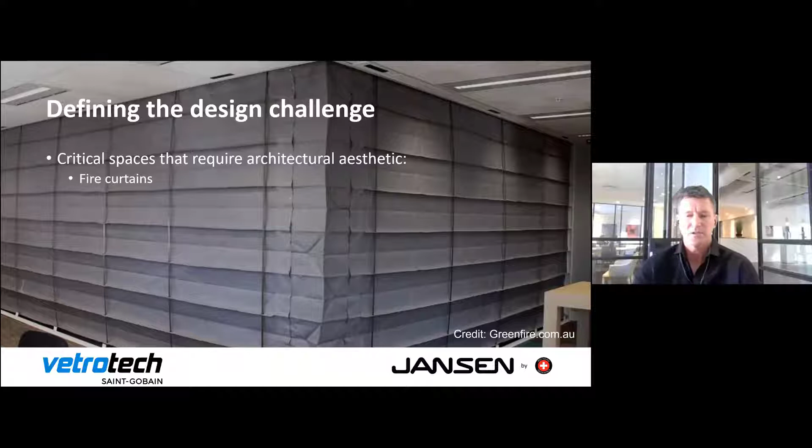So where would you use these? Typically in areas where you'd need fire curtains, there are places where, because of bulkhead details, it just doesn't make sense to use a fire curtain, or there might be budgetary requirements that make fire curtains not the right way to resolve the issue everywhere. Another typical situation is where you have to do drenching with sprinklers.

This is actually a building I'm sitting in at the moment, and that's a glazed meeting room. You'll see a lot of sprinkler pipes to drench that. In some countries this is no longer allowed, because cold water on the glass under fire load can cause it to shatter. So this is a typical instance where you might want to use insulated glazing.

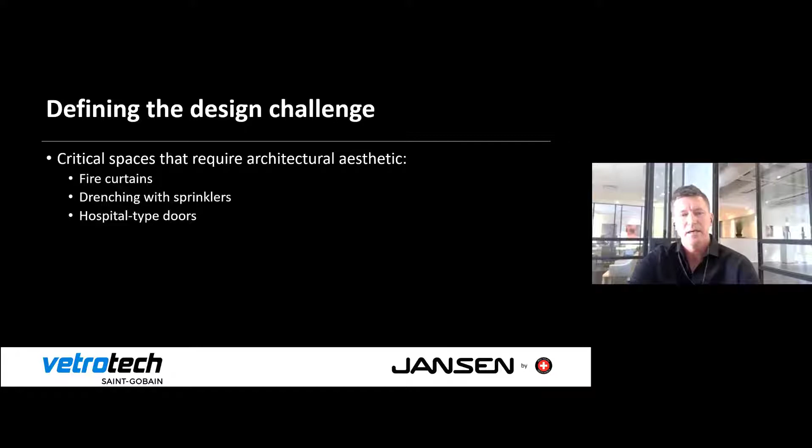This is the Class B typical doors that I mentioned at the beginning, and the small portal as per the code. Again, you might want in an atrium area to have something more aesthetically appealing, so you'd want an insulated glass double door, a Class B door.

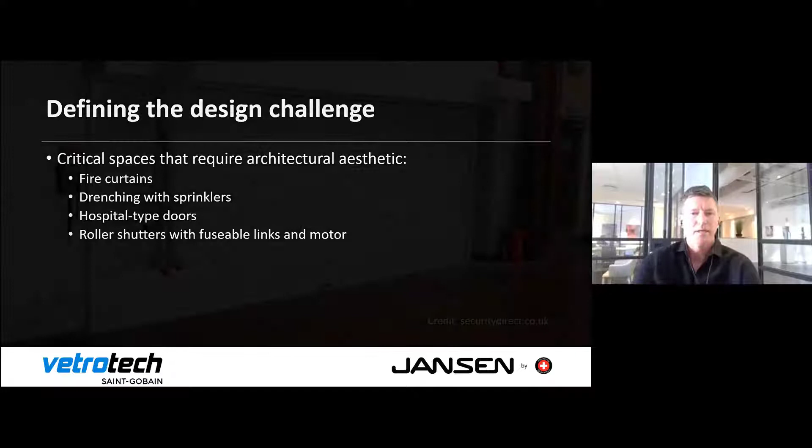Then maybe the last one is roller shutters with fusible links. I know these are being used quite often now in lift lobby situations where you need both the shutter and the fusible link, and you need a motor, because some fire engineers insist that it can't drop too fast, as that might be a life safety issue. So those are the typical situations where you would use it.

What I'd like to do now is hand over to Kobus Stredom, but just before that I want to introduce him. Kobus, thanks to you and all the speakers for being here. I know that during COVID it's been quite a stressful time for all of us, so we really appreciate you taking time out of your schedule to join us.

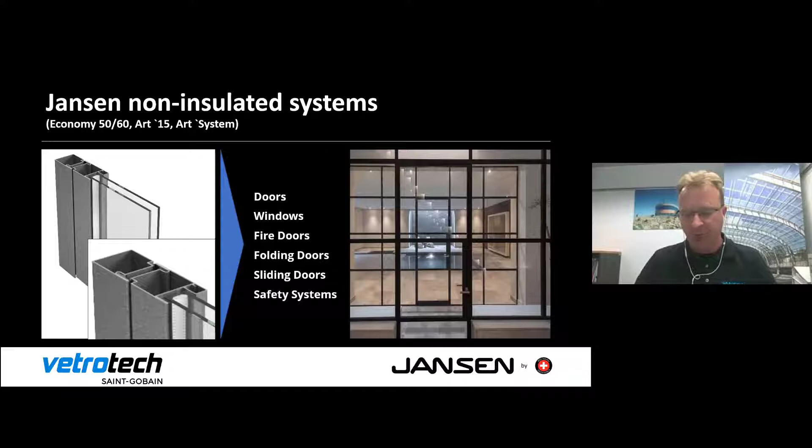Maybe these systems will not have the best thermal values — this is why they're used for indoor applications — but they do offer the design freedom and the statical strength of steel. Therefore, they can also be used for folding doors, sliding doors, larger elements, and safety systems. When I say safety systems, I mean burglar resistance systems up to class RC4, which is quite high in the market, and bullet resistance up to class FB6, which is a machine gun, a Kalashnikov. On some projects, we have also realized solutions which are explosion proof. So these systems will go a long way. A couple of examples: inside applications, a sliding door, and a folding door in a private house.

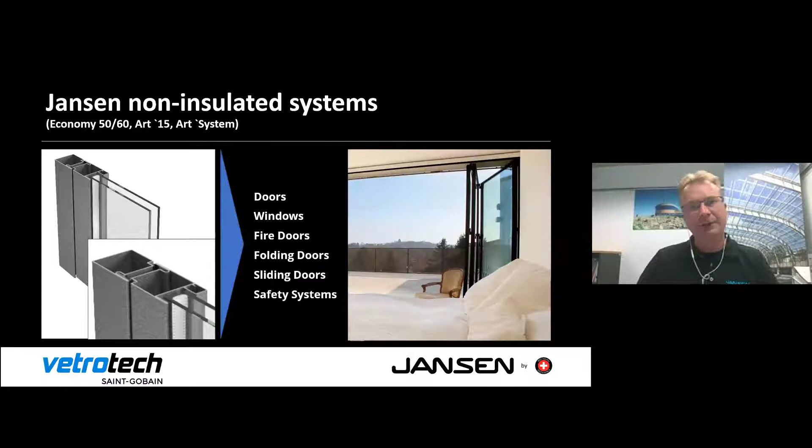Let me move to thermally insulated systems. Here we talk about the Janisol system, Janisol HI — highly insulated — and the two ARTE systems with small, thin profiles, ARTE 2.0 and ARTE 66. These systems are based again on the same principle: we have two steel half shells connected with an FRP insulator, fiber glass reinforced plastic. The chambers within the profiles are separated by aluminum screens, increasing the thermal values well beyond the passive house standards.

We can make doors, windows out of these systems, folding doors as well, sliding doors, and safety systems. Safety systems, of course, here again, meaning burglar resistance, bullet resistance, finger protection, and also emergency panic doors. All our safety systems can be equipped with the panic functions, panic function B, C, D, E, depending on the requirements.

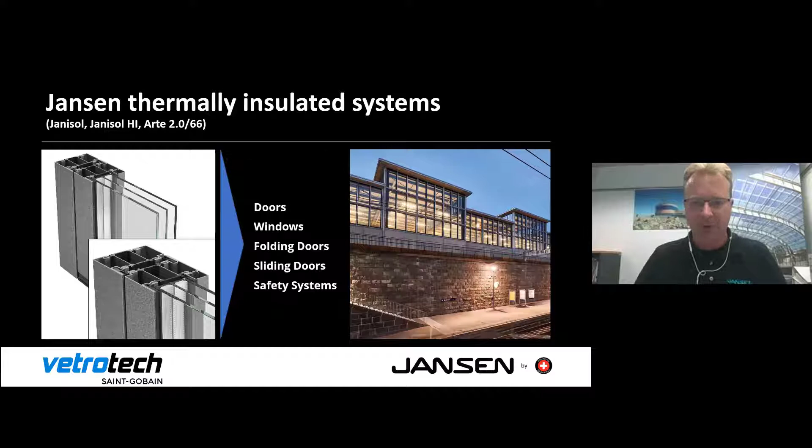A couple of examples here. This is a residential building in Amsterdam, ARTE 2.0.

Let me move on to the thermally insulated fire systems. Here, JANSEN features two profile families. The first one is Janisol 2. The system or the principle actually is the same as the insulated systems. We have two steel half shells connected with an FRP insulator. Additionally, these systems are equipped with cooling material, cooling agents. In the case of Janisol 2, this is plaster, gypsum, two inserts on both sides of the profile. The role of the material is to cool the frame, to cool the profile during a case of fire, thus allowing us to cover the classes EI.

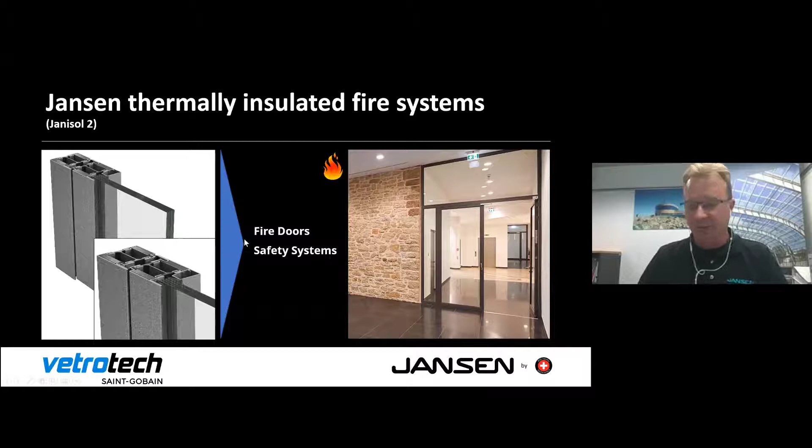So these are thermally insulated fire stop systems up to the duration of 30 minutes. We can make fire doors out of Janisol 2 and also equip these elements with safety features. Again, RC burglar resistance, FB bulletproof, panic functions, finger protection, and so on.

Let me move to the next system, which is Janisol C4. Next to Janisol 2, JANSEN offers a state-of-the-art system for insulated fire protection. Again, the same principle, two half shells connected with an FRP insulator. In the case of Janisol C4, C stands for ceramic mass, fourth generation of the ceramic mass which fills the profile. The profiles, as you see on the picture, are fully filled with the ceramic mass. The profiles feature a plastic conduit for electrical cables or an additional locking point, the locking rod that was run through the conduit. So prepared for several different functions.

The ceramic mass will have the same role as the gypsum inserts on Janisol 2. They will cool the element, cool the frame, and in connection with an insulated glass, we can cover classes EI 60 minutes, EI 90 minutes, and on projects we have realized also values of 120 minutes, 2 hours.

The combination, so let's see what elements we can make: of course fire doors, separations, fixed glazing based on the system, and equip these elements also with safety features. Again, here we speak about bulletproofing, burglary resistance, finger protection, panic doors, emergency exits. In fact, Janisol 2 and Janisol C4 are often used to produce multifunction doors that feature all these functions in one.

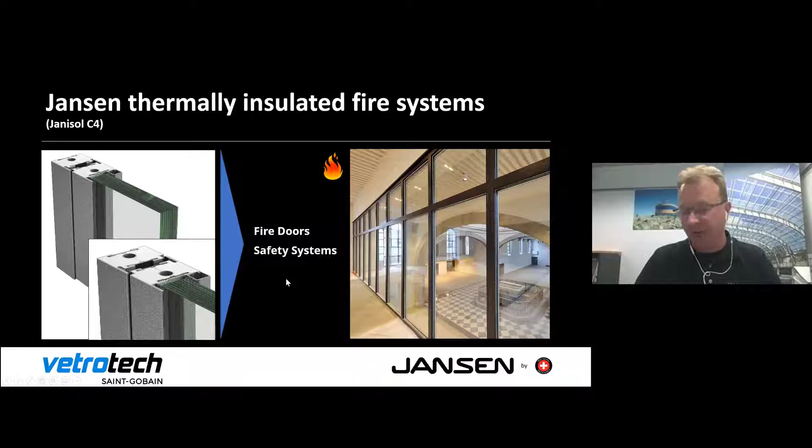Let me move on to the facade systems and roof glazing systems. Within the JANSEN portfolio, you will find them under the name of VISS. VISS stands for Fully Insulated Sprossensystem, which in German means mullion and transom system. VISS can also be built as a VISS Basic system using the carrying construction not based on JANSEN profiles. So here the design freedom is great. You can use either the full package from JANSEN or base it on your own carrying profiles.

VISS Fire features the fireproof version of the system, classes 30, 60, and 90 minutes. Facades can be made out of VISS, roof glazing, fire solutions. So as I said, all these systems, either the standard version or fireproof version.

Safety systems, as I said, also can be combined with VISS. So here again, we have the option of equipping a facade or a roof glazing with bulletproof functions or burglar resistance functions.

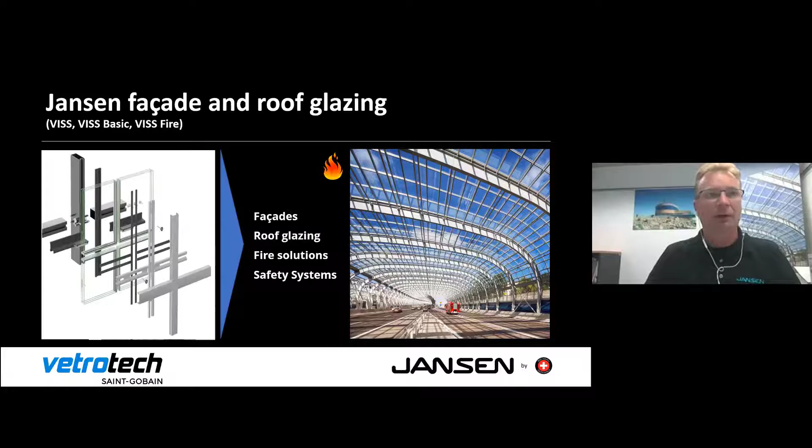Now the question, why steel? Why do I mention steel so many times? Steel is really the great material for windows, doors, and facades. Let me tell you a couple of reasons why this is so. Fire resistance and thermal expansion and thermal conductivity are key when it comes to fire protection. Steel has a higher melting temperature than aluminum, 1,550 degrees Celsius versus 660 degrees Celsius, and this shows.

Thermal expansion is also key when it comes to large elements. Imagine a facade 130 meters long and 20 meters high. The expansion will be enormous here, and again it makes sense to use steel on such projects instead of aluminum.

Thermal conductivity is also something I would like to mention. Steel is a better insulator than aluminum, and therefore it has better thermal values when it comes to thermal separation.

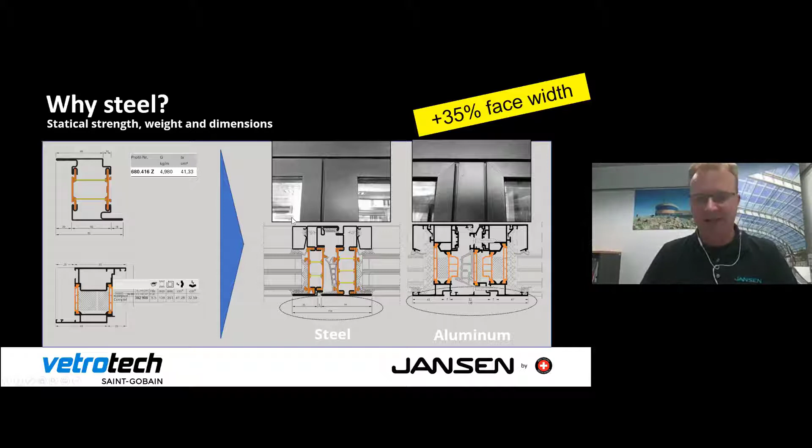And the last reason I would like to mention today is the design freedom and longevity of the material. With steel, I could say it's really the material that makes architects' dreams come true. You can see it here in this picture.

So all in all, to summarize my presentation today, the systems we offer at Jansen allow the construction of any element that constitutes either a separation of an inner space in a building, or builds the outer skin, the envelope of a building. Steel is strong, it has long longevity, and it does not require any reinforcement when it comes to oversized and large loads of glass.

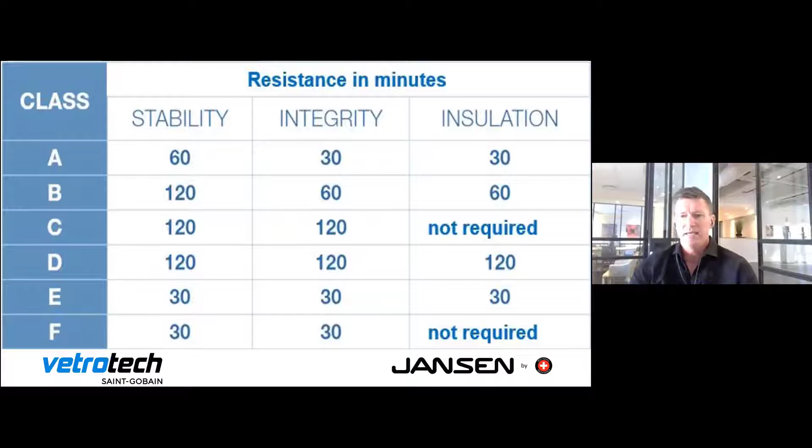At the moment in this country, class F door at the bottom requires 30 minutes stability, 30 minutes integrity, and insulation not required. So currently we can do that with glass in South Africa, but as soon as you have insulation requirements like you see on the screen here - class A, class B, D and E - then you need insulated glass. And for that reason, we've got Luis Cantero, who's been in the space for a long time, joining us from Spain, from Madrid.

He's the country manager for several South Europe and Africa countries, including South Africa, and has been in this industry for over 30 years, and specifically in the fire space with VETROTECH for 13. He holds a technical and MBA degree, and Luis will be giving us an overview of the glass options from VETROTECH, and maybe be a help to you as architects when you are specifying.

Thanks, Luis. Okay, thanks, David, for your presentation. It's a pleasure to be here with you, and thanks to all of the participants. I'll share my screen right now. I'm sorry if, because English is not my mother tongue, but I hope all my colleagues will also help with the language if anything doesn't work.

The goal of this presentation, a 15-minute presentation, is that you understand all the capabilities of the glass, and to differentiate the three options that we have on glass: integrity, as David said, EW, like heat radiation control, and the fully insulated fire resistant glass, but in Europe standard we call EI.

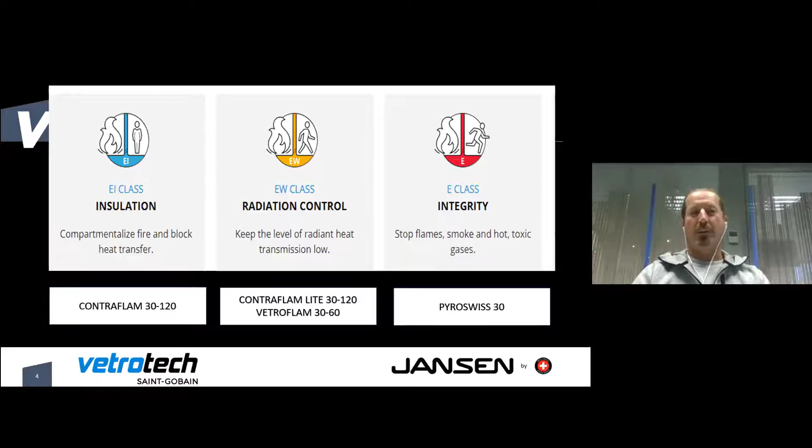On the other hand, on the left, you have the most performant glass classification, which is EI, which is insulation. There you can compartmentalize and block the heat transfer. So as you see in the pictogram, if you stay close to the glass, even when the fire is 1,000 degrees on the other side, you can be safe.

In between these two categories, there is an EW category in the European standard, that does not happen in the South African standard. EW means you have partial heat control of the radiant heat, so it can be safe, but you cannot stay there for very long.

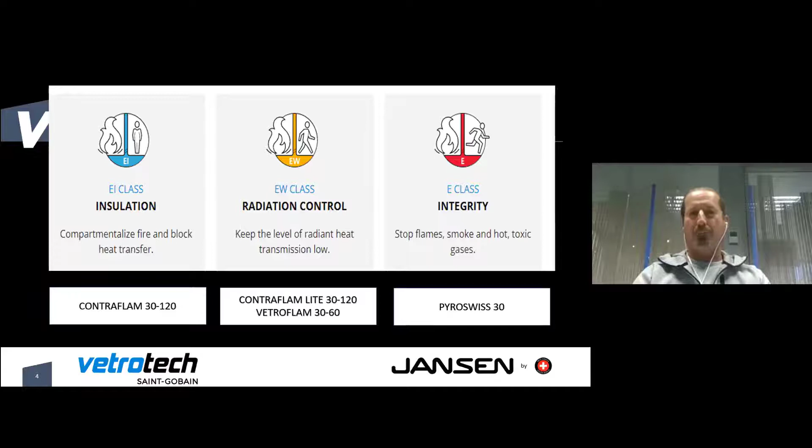Now I won't show you all the video, because I'm quite late on time, but I just want to show you the consequences of having the heat on the glass.

I can go. You can see here how it's just the consequences of having the effect of fire, the temperature of the fire on the other side, on the protective area. A piece of cloth and paper are stuck on both glass panes fitted into a frame. They simulate objects on the non-fire side during an event of fire. What do you think will happen to them?

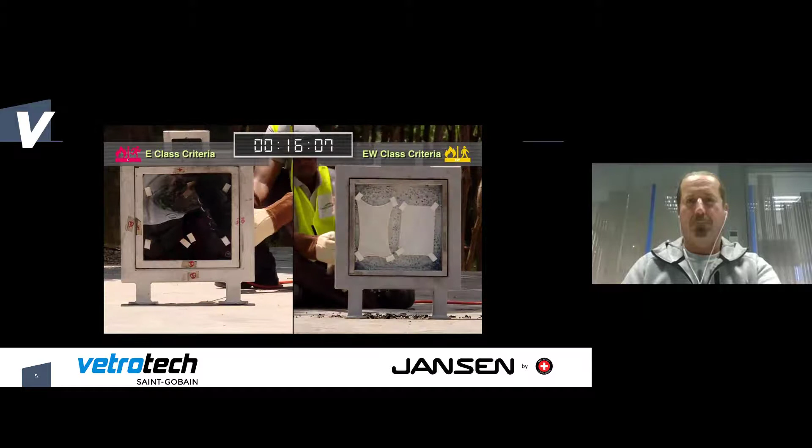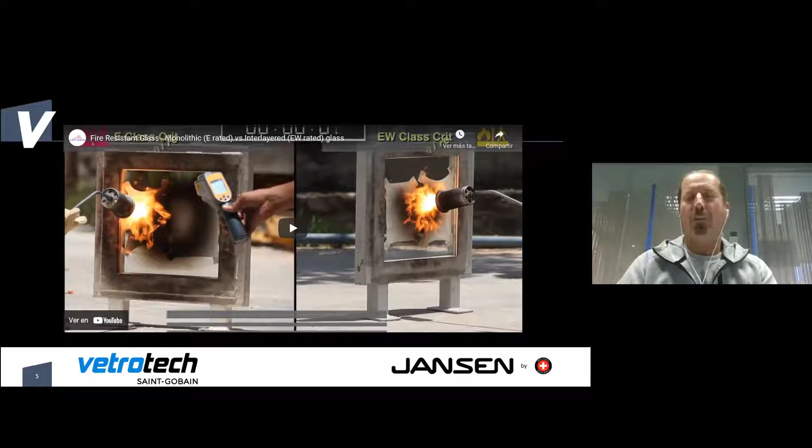Okay, I think that's enough to show you the difference between an E and EW or an EI. On one side, the temperature is not controlled, so you cannot consider that area safe. On the other side of the partition, with the EW or EI class, where you fully control the heating of the fire, you create a safe area to be protected from fire.

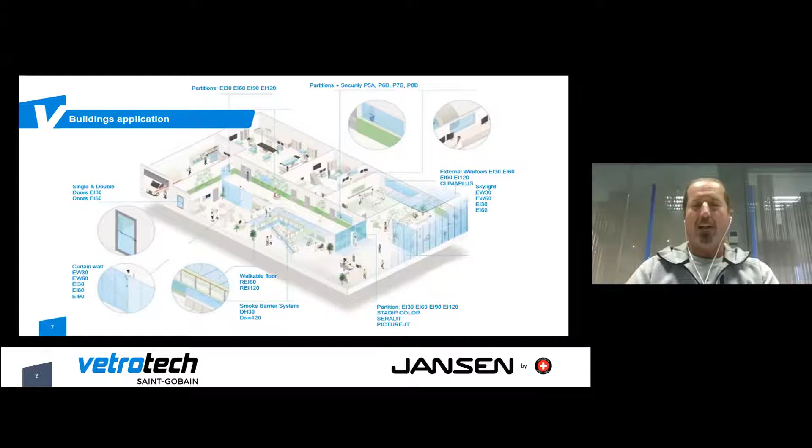Even we can provide solutions for stairs, walkable stairs that are also fire resistant. So you can be as flexible as you want with your designs, and you can count on glass that satisfies the needs of fire resistance, and also local requirements like solar gains, isolation, thermal isolation, and so on. That is the way we normally treat the prescription with the architect.

The first question we ask is: what fire resistance level do you request? Do you need integrity only, heat radiation control, or full insulation? Then, what is the time of fire resistance you need to evacuate your building according to the standards? It can go from 30 minutes to 120 minutes. And then, of course, what system do you need? Do you want to use steel, aluminum, or timber?

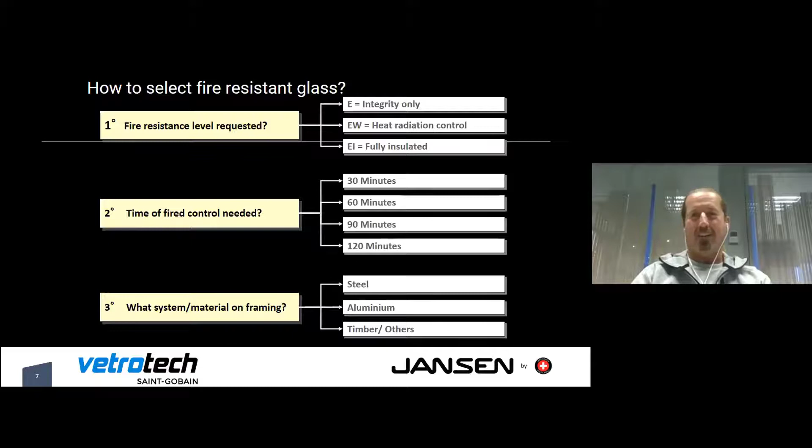Of course, steel, as Andrea said, is the one that will get you the lowest thickness and more sizes compared to aluminum, timber, or other solutions. So if you don't want to see a frame, you need to go with steel because it's the most suitable solution.

Then we have to think about what application or use we need. Is it an interior or external application? Do we need double glazing? Do we need solar control? And something very important for us: is the fire origin one side or two sides? We don't propose the same solutions if the fire comes from only one side or from two sides. That is, as I said, very important.

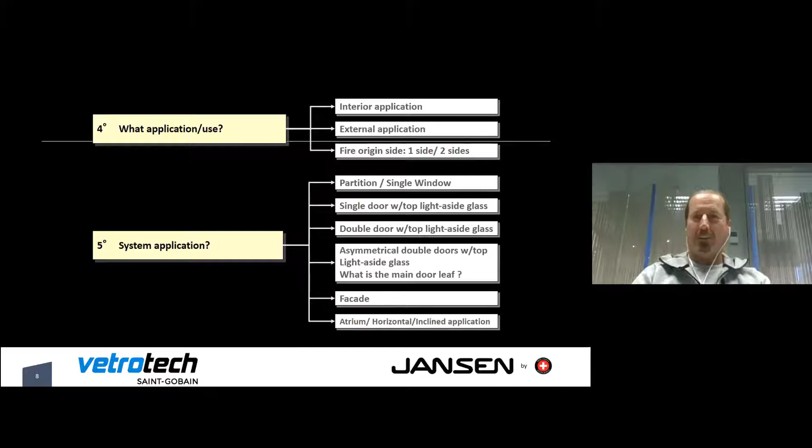The system application can be a single window, a partition, a single door, a double door, an asymmetrical door, a facade, or an atrium, horizontal, sloped, or inclined application. Why this fifth point? Because all these solutions are tested, and tested under different standards, and tested differently. It's not the same to test a door as to test a partition, nor a single door as a double door. So it's important to be aware of what we have tested and what has been proposed for your building. We cannot certify a double door with just a single door test report.

And then, at the end, the last point is just the configuration of the glass itself. Is it single glass because of interior application, or not needed for thermal or acoustic performance? Or is it a double glazed door?

Is it laminated because you need to protect also from attack, or do you need some opacity, some confidentiality? Do you need to control the noise? Then you have acoustic PVB, and we need to know also what is the dB values, and if we are talking about RA or whatever.

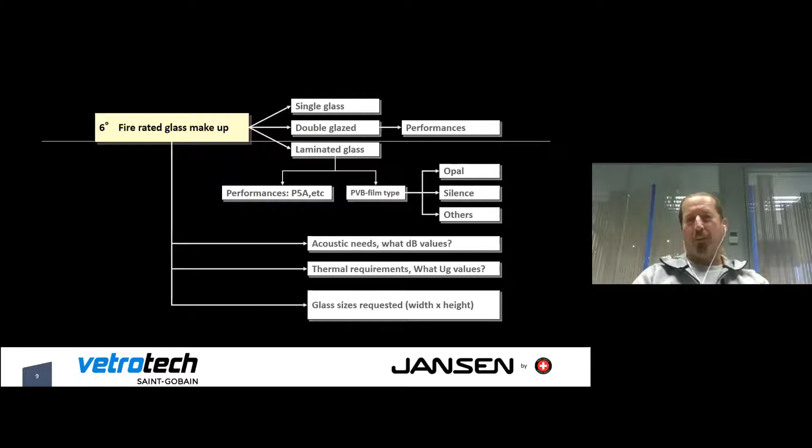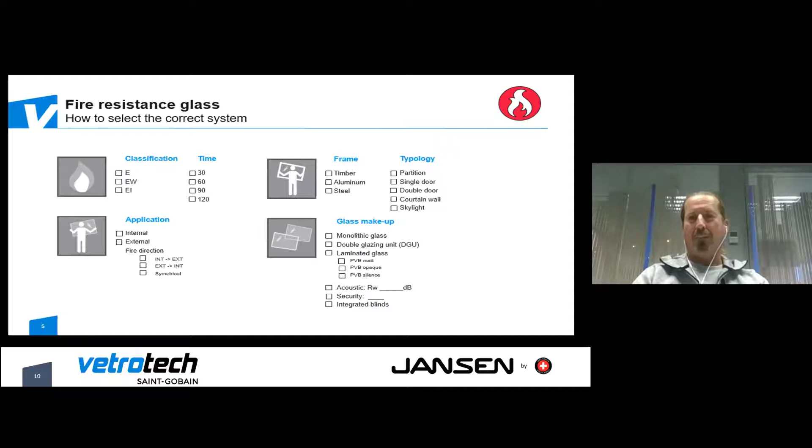And of course it's important to know width by height, because we are limited because of the testing. This is the slide we normally send to the architects so they will fulfill it with all the elements they have, and if they don't have it, then we will help them to define their requirements.

This is just an example of the test. In every test we run, we have a test report at the end, and they give in this, if you see on the right page, the sizes of what we can propose and the configuration.

This is very important. We cannot go with one single window test to run a partition and to certificate a partition. That's why we have run, together with JANSEN, more than 4,000 test reports, which are available for all markets, because of the different improvements we have done with them over time.

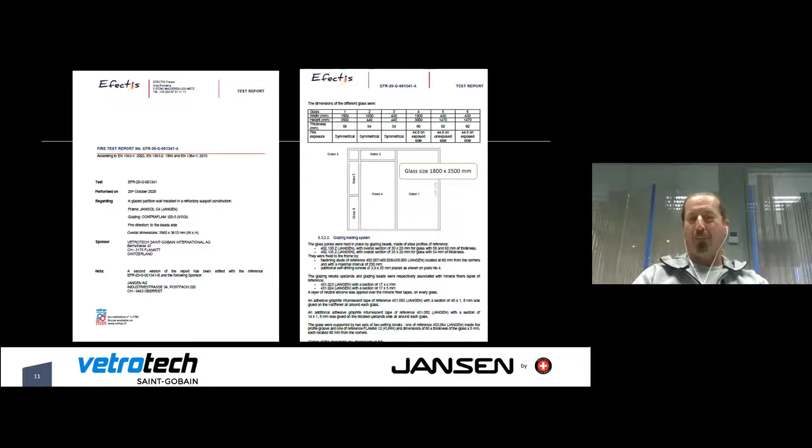This is just an example of all the performances we can have on our DOP, on our data sheets, including the light transmission, the performances, and everything.

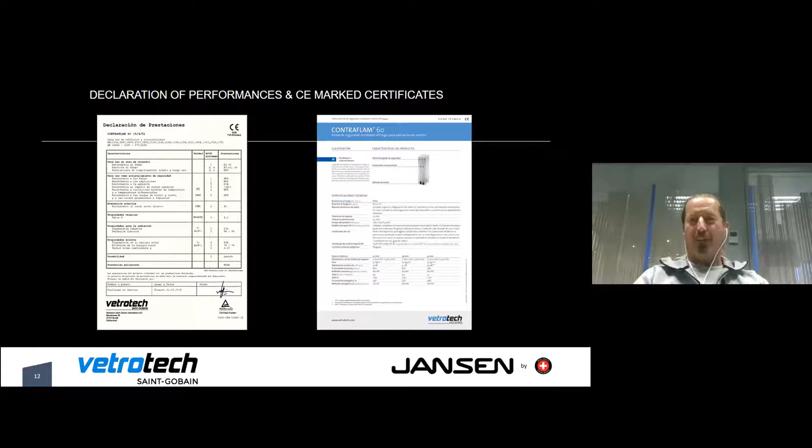And the last slide I can give: the glass is a green product. We have all the EPD certificates, we have all the green levels, and we are working every day in reducing our impact on the environment.

That's the end. Sorry if I've been 6 seconds late. Sorry, David, and I'll pass you back again.

That was very informative. Thank you, Louis, because I think your tables and schedules will be very helpful for guys when they're trying to take a view on specifying these products. So thanks again for that, and your English was excellent.

Thanks. All right, so our next speaker has joined us, Stefan Vetter, who is joining us from Basel in Switzerland, regarding a case study in Dornbirn in Austria. It was actually with his previous practice, Marte Architects, and Stefan Marte was happy for Stefan Vetter to give us this case study.

He's done a lot of work in the space, and he actually had a portfolio online which I can't show you, just to give you an idea of what he's done. He's done projects across various project scales, from exhibition spaces and large buildings to smaller, more intricate, articulated residential developments. So, Stefan, thank you so much for joining us.

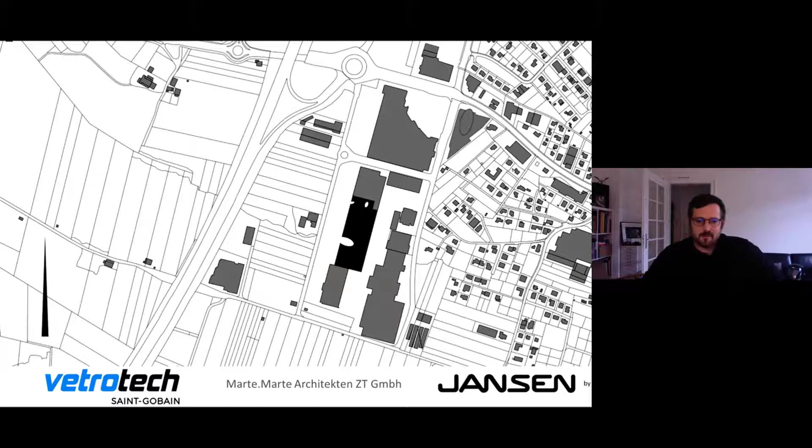It's in between 9 and 11, and it's a very important room because there you have the entrances to both halls and a huge foyer, which is also big enough to make some events. And you're lucky enough that through the big glass facade, you're able to watch through the foyer into the halls. So you have a little impression if you're in the courtyard, what's happening in between or in the black halls.

Thanks, I think we can move on. There's the ground floor. In the center, you see the huge loading area with a lot of doors to get the people outside if needed, and some huge doors to get the truck inside if needed. In between the halls in the front, there you have the foyer with the big elliptical shape in front.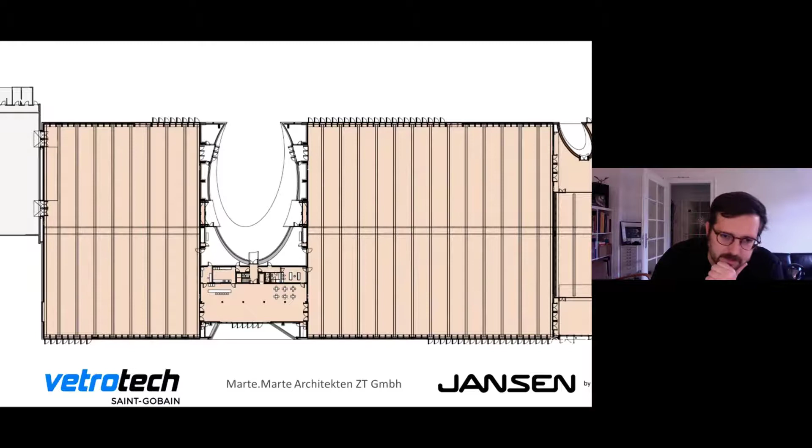You see small on the left, on the right-hand side, a big glass part which allows a view through the foyer into the halls. On the right-hand side, there you have the little hall 12, and this hall and the loading area are concrete buildings. The rest is wooden, and the facade is fully metal covered.

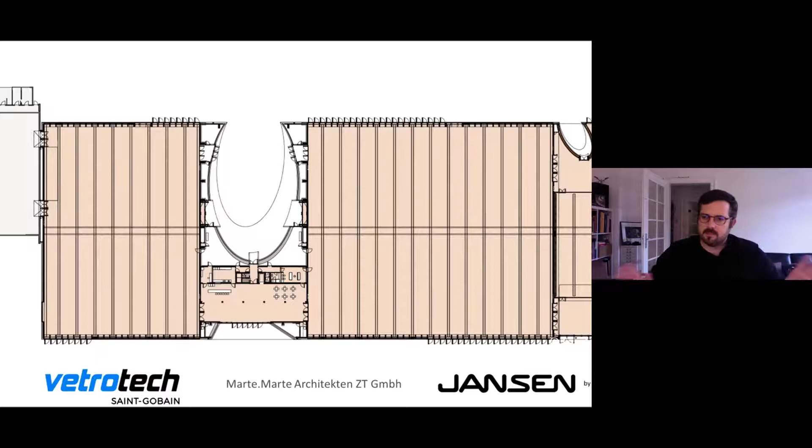So that's about it for the moment.

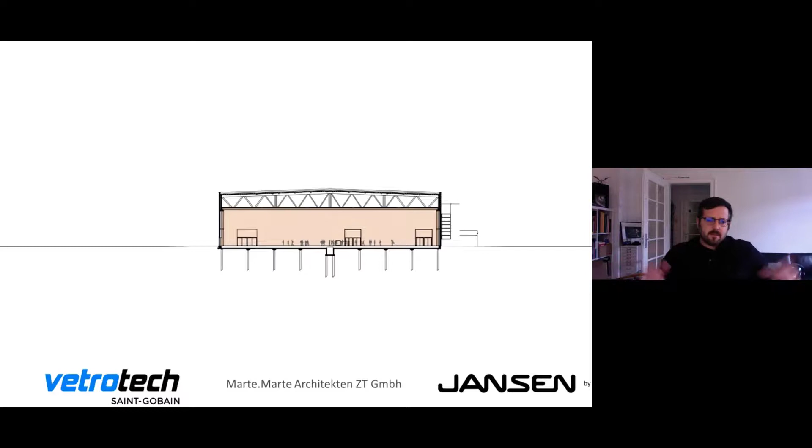Here you see a section through the halls. I think it's about 15 meters high and 75 meters in diameter. And in the top you have a huge wooden construction, which is I think 5 meters high.

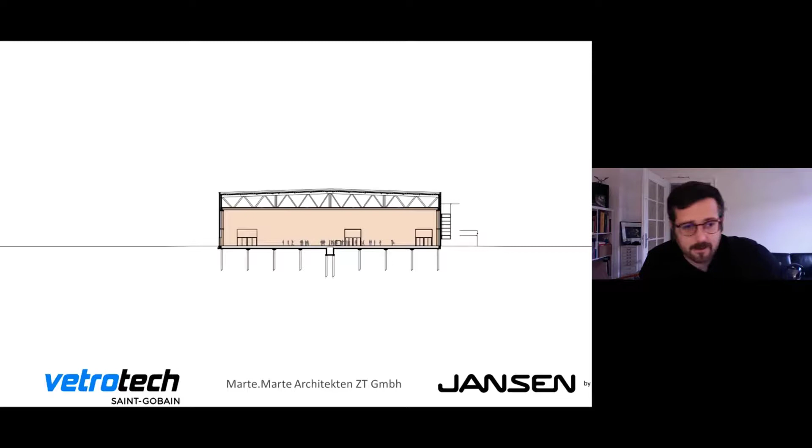So to have huge exhibition halls without any constructions in between the facades, we had a lot of discussion because we wanted to paint everything black in the halls, and everybody likes wood, nobody was interested in painting it black. But I think at the end everybody knew exactly why we had to paint it black.